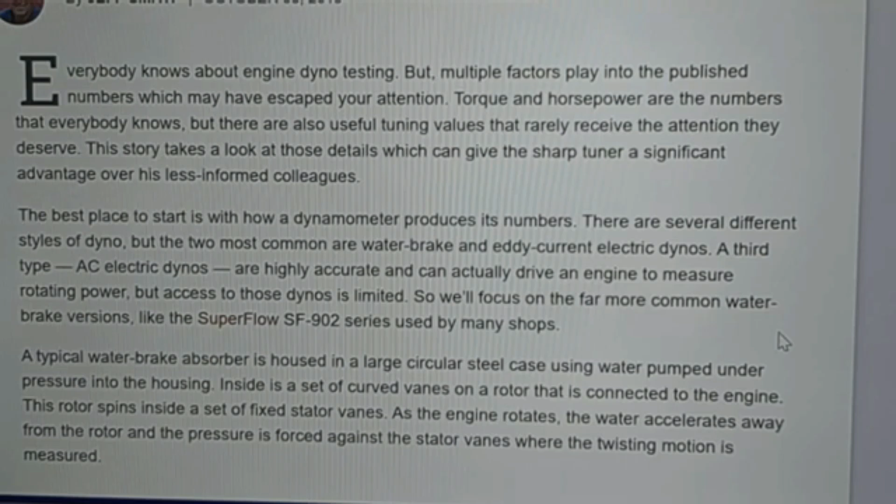This is where your temperature comes in. Anytime you push water under pressure at high speeds, the water gets hot, and very quickly. As this rotor spins, the water brake is bolted to a big steel rack assembly. If it were not bolted down, this engine would do backflips the moment you tried to load it down—the engine is trying to twist this brake, and the brake is bolted down on one side.

The other side is hooked to what's called a strain gauge. So as the brake is trying to pull away and actually rotate, the absorber can't rotate away because the strain gauge is hooked to that one end of it, and the other end is hooked to the frame. So the harder the engine pulls, and the more water they throw to it to stop the engine, it's putting that pressure on the strain gauge.

So imagine you're hanging out of a helicopter and you've got this person by one arm, right? He's hanging on to your arm. Well, your hands, where they're connected, holding onto that person, that would be the strain gauge. I know that's a weird example, but the more the helicopter accelerates upward, the more pressure you're going to feel trying to hang on to that guy. Well, as you rev that engine and load it down, that strain gauge is feeling every bit of that twist.

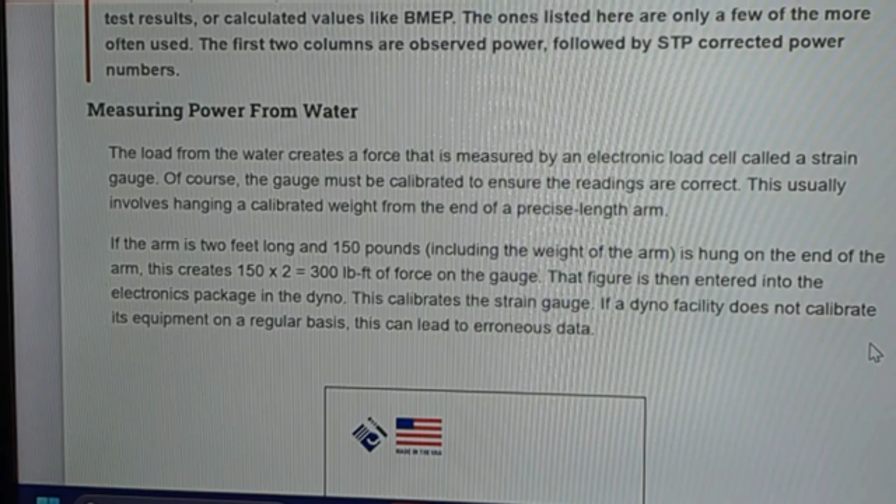So calibration is extremely important, and it's really simple. You may also see, if you go in a dyno room, a tall rectangular black looking box - at least ours always was - and it usually weighs between 100 and 150 pounds. You bolt this little arm onto your water brake absorber, usually a foot, maybe 2 foot long, and basically if it's 150 pounds on a 2 foot long arm, that's 150 times 2, that's 300 pounds of force on the strain gauge. So you go in there to your dyno and pull up calibration, if you have a nice digital one, and just make sure it's calibrated. It should be reading 300 pounds.

So that's the starting point, making sure your dyno is calibrated. Now the reason why it's important is because the dyno actually reads torque, and it reads torque from the strain gauge. Then we have a mathematical equation that says horsepower equals - and always work the parentheses first, like when you're doing math problems - torque times RPM divided by 5252 equals the horsepower. So it's pretty simple, and computers can do that kind of math super easy, super fast.

Now, when you get those numbers, that is observed power numbers that come directly off the dyno based on the atmospheric conditions you have right then at that moment. Anytime you're doing dynos across multiple days, your days usually are going to have a little bit different conditions. Sometimes they're pretty dang close, but this is why we have correction factors.

So if I'm dynoing a day where it's 98 degrees outside with 80% humidity, which it does here in North Carolina, and then I might be testing in November or December where it's pretty cold and dry air, hopefully my dyno can correct for that, and I can see that my engine is either performing as usual, or I'm down, or I'm up. That's the whole point of correction factors, so that you can be fairly consistent across different weather conditions.

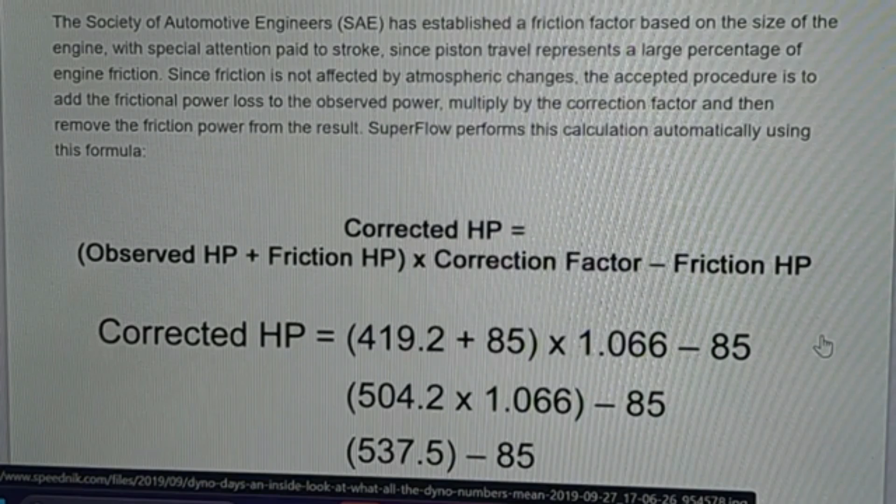Friction is not affected by the atmosphere. So the accepted procedure is to add frictional power loss to the observed power, multiply by the correction factor, and then remove the friction power from the result. That's how SuperFlow does it. Basically, you have corrected power, and then they take out what they consider to be the friction losses based on the size of the engine.

This is why, at least on the newer model stuff—the old stuff didn't really have much effect—but the newer stuff in the last 15, 20 years will accurately calculate the friction loss.

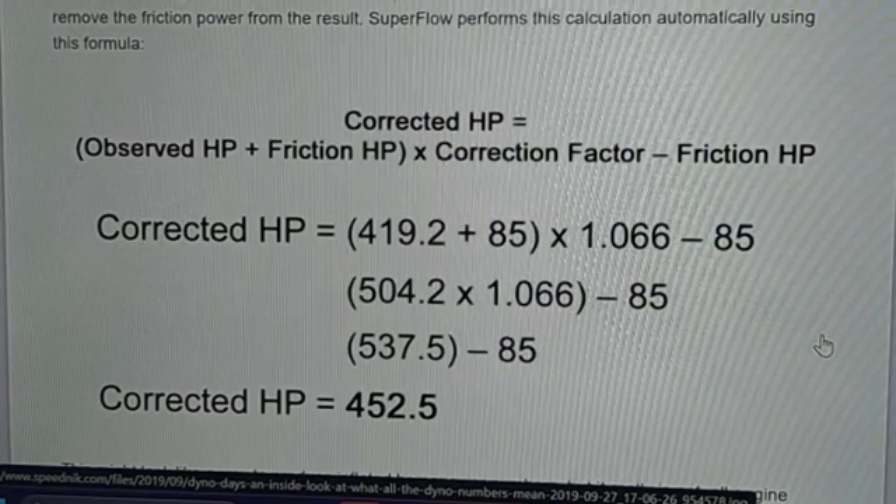But here's how you can fool that, okay, and this says good things about you as an engine builder. Basically, the friction loss is based off of stroke and piston travel. But what if you got that friction down to about nothing, comparatively? If you were able to get your coatings, your hone, your skirt, and your rings correct, think of the power you're freeing up because you cut that friction down. That's why I pay so much attention to that, because friction loss is a big deal. Now, the computer may think you have this typical friction loss, but it doesn't know that you've all but eliminated it. See what I'm saying? So there's a lot there to be gained.

Now, they made it a point here, and I think I should point it out, that the correction factors allow us to compare different combination tests on various days with reasonable assurance of comparable numbers, despite atmospheric changes. It's worth noting the Society of Automotive Engineers changed the production engine correction factor in '93 to reflect normal operating conditions more closely. The new standard is a pressure of 29.234 at 77 degrees Fahrenheit and 0 humidity. This reduces the corrected power numbers by roughly 4% compared to the STP version.

You'll notice that where I live, at sea level, it's a different number and a higher temperature than at sea level with the old STP correction factor. So they've changed that now, and it should be a lot more accurate than it was.

Now, I'm not going to get deep into this, but I really want you to pay attention here. The BSFC, brake specific fuel consumption—this is a measure, and this is where a lot of people don't understand it. It's a measure of efficiency, but it's often misconstrued as a measure of whether the engine is rich or lean. Thank you very much, Engine Labs. An engine with a BSFC of 0.52 does not necessarily run richer than one with a brake specific of 0.42. What it means is that the latter engine requires less fuel to make the same power. So don't try to figure out your BSFC as a richness indicator—understand what it actually is. And if you don't do dynos yourself, but maybe you get some done, this will help you understand what you're looking at.

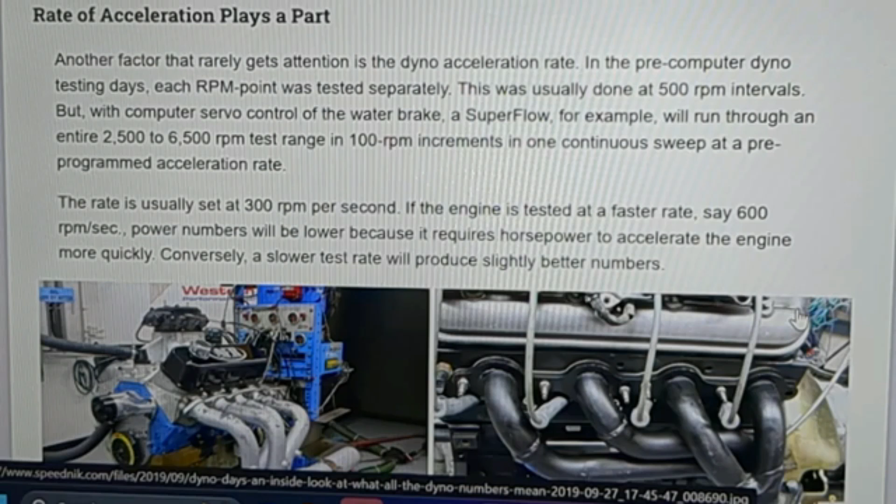Some people do steady state checks, which is a great thing to do. You go to a certain RPM - let's say 3,000 - and just hold it there. The engine will record a torque and horsepower number right there. It's not climbing, it's just at 3,000. Then you can go to 3,500 and hold it there, and it'll record the numbers, and on and on. Those are called steady state pulls, and they're very accurate.

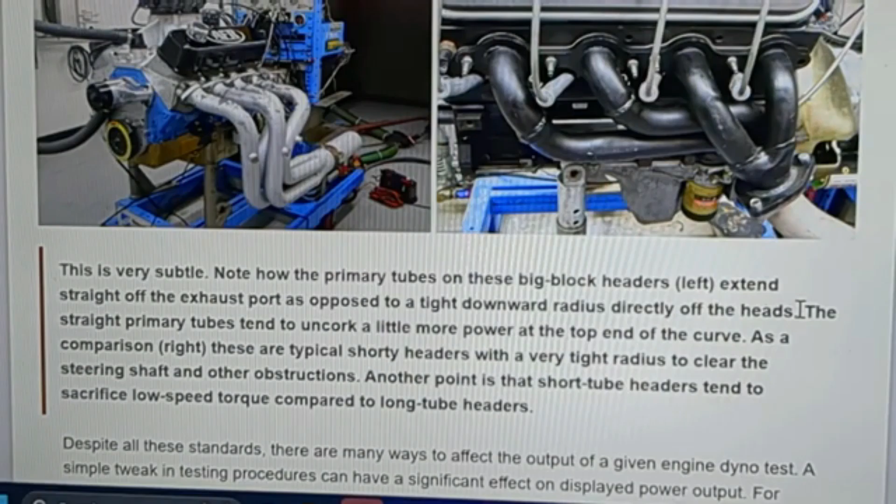Now we're getting to the point of this video. Notice this footnote - it says note the primary tubes on these big block headers. On the left, they extend straight off the exhaust port, about 8 inches or so, as opposed to the right side where you have an immediate downward turn. Do you think these two headers make a difference? You bet. Notice the exhaust - you've got a header there and maybe an 18-inch collector afterwards. Keep that in mind as we go along.

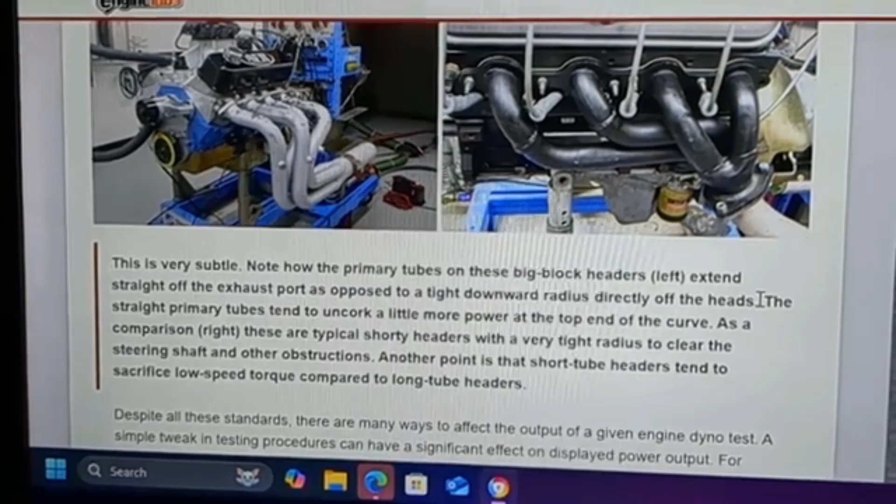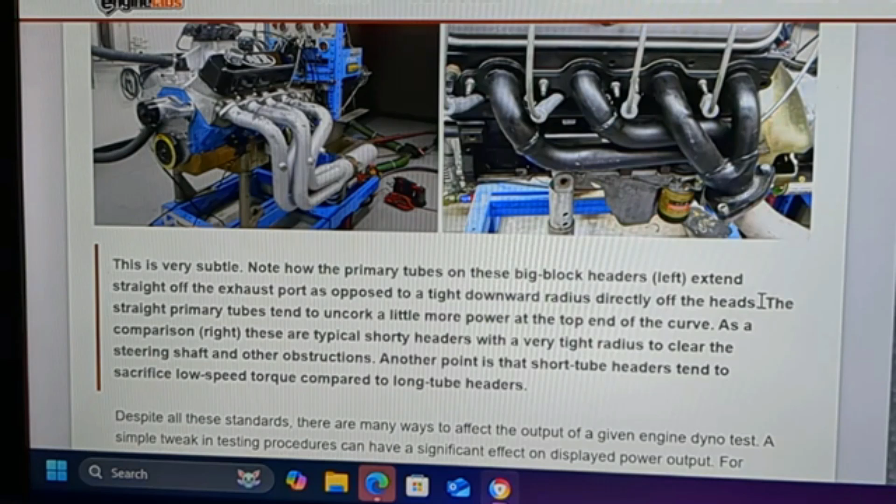The straight primary tubes tend to uncork more power. The ones coming straight off the head will make more power at the top end of the curve compared to the right. Those are typical shorty headers with a very tight radius, put in there for steering shafts and other obstructions. The short tube headers tend to sacrifice low speed torque compared to the long tube headers, which with the larger pipe and straighter path off the head are just better everywhere.

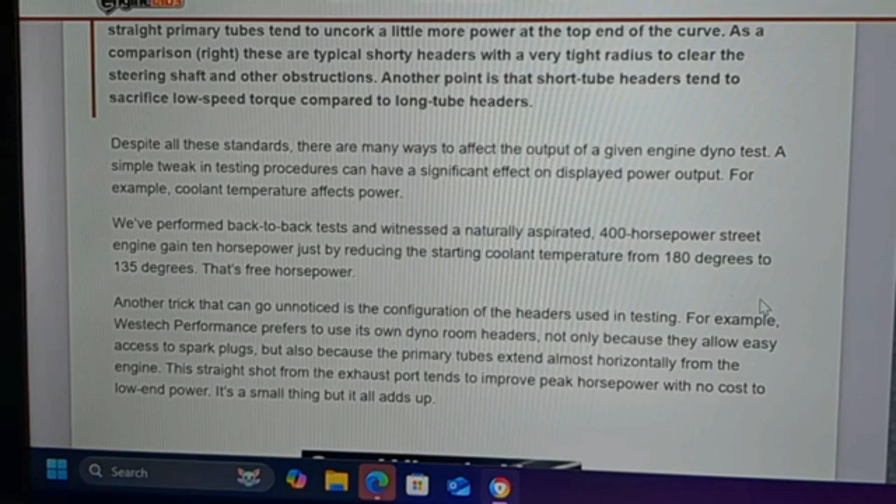Going back to the temperature of the engine, this article says we performed back-to-back tests and witnessed a naturally aspirated 400 horsepower street engine make 10 more horsepower by reducing the starting coolant temp from 180 degrees to 135. So just from the water temp alone it was over 10 horsepower. Another trick that can go unnoticed is the configuration of the headers used in the test.

Westech prefers to use its own dyno room headers, not only because they allow easy access to plugs, but also the primary tubes extend horizontally from the engine. This straight shot from the exhaust port tends to improve peak power with no cost to low end power. It's a small thing, but it all adds up.

Here's something I learned many years ago in NASCAR land: one day everybody started cutting their air cleaners down. Look at the left and right air cleaner base. Notice the one on the left is taller than the one on the right. Well, the one on the right makes about 8 more horsepower than the one on the left. Pretty crazy, huh? Also, I don't like these flat bases here. I like the one with the big arching radius. But I don't know, I'm going to have to go back and do some more testing on some of this.

On a few cars that I built for, we changed to this style lid. We actually went in there and machined this down, and we wound up putting it on a belt sander once we got it all cut down to get it back flat again. And yeah, 8 horsepower is 8 horsepower, right? Little things like that matter. Don't let anybody tell you that little things don't matter, because they do. And if you get a whole bunch of little things, it adds up to big numbers.

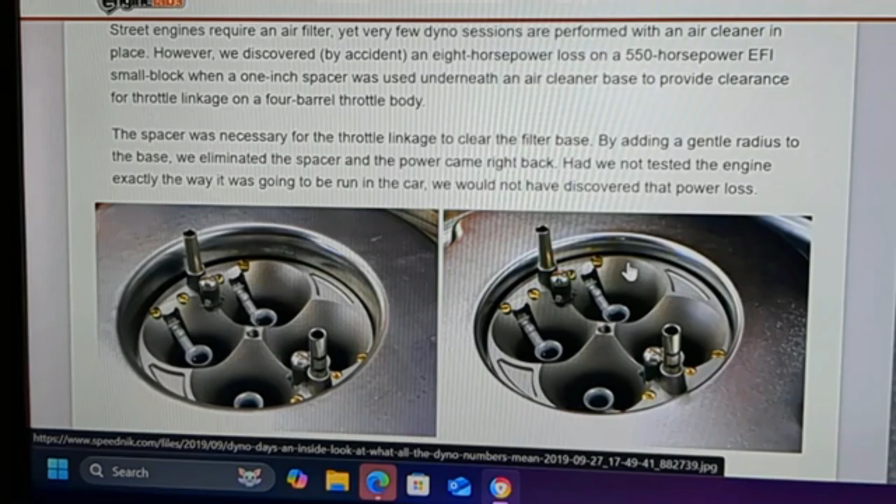So I've told you some things that will affect your dyno readings: your temperatures, whether it's air, whether it's water of the engine, whether it's water of the dyno cell itself, the air temperature coming in, the humidity, barometric pressure. All of those things, your calibration, all that stuff affects from one pull to the next, right?

So here's one that is a big thing, and this is what I said in my one video about dyno wisdom. In the video, I said that you need to make sure your dyno is prepared to handle multiple changes, because some dynos have the same exhaust pipe, like 3.5 inch, and it looks like 3.5 inch all the way out, right? It might be 10 to 15 feet long before it goes into a muffler.

And the reason that's a problem is because when you change induction, different intake manifolds and different headers, or different camshafts, the exhaust starts to back up in the pipe, and it will, when your horsepower gets high enough. It affects your engine at overlap. So when both valves are open, the exhaust backing up will cause you to have low intake flow because it's flowing up into the intake.

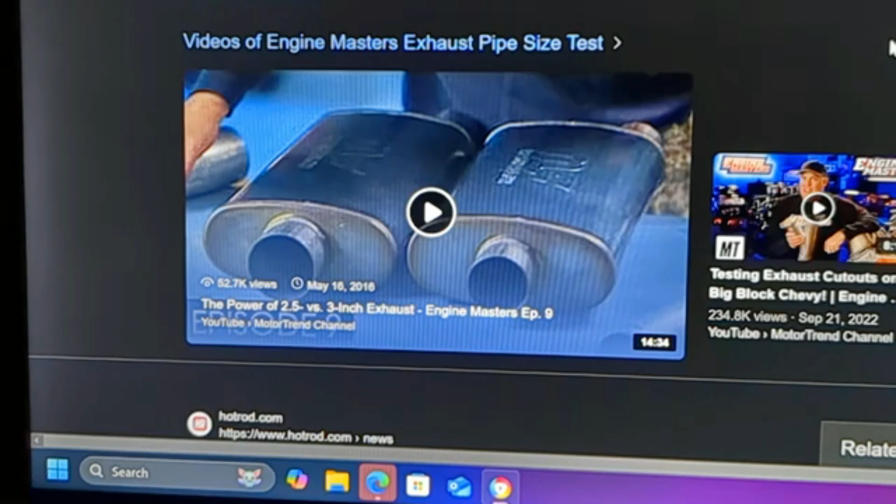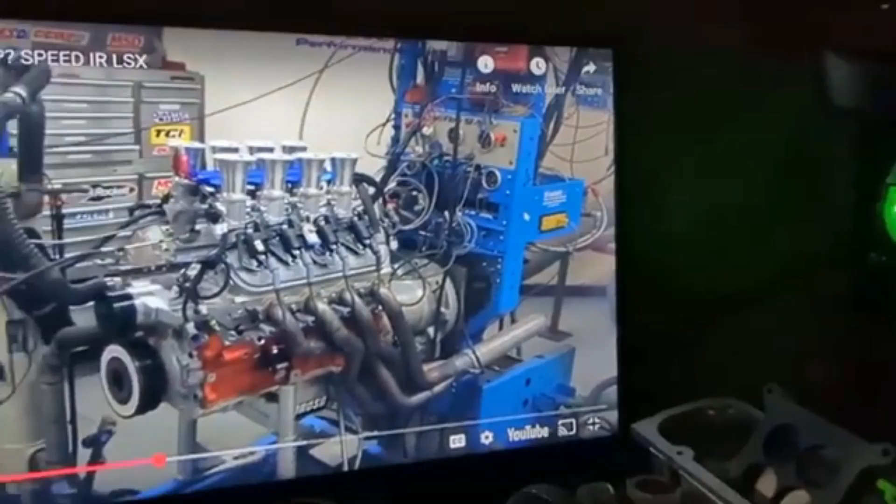Now here's what I want you to see. Look here, look behind it. Everybody see that pipe? You see this right here, in the background? That is the exhaust pipe for the dyno room. That thing is a good 10-inch or so diameter. Those are the ones like we ran on our dyno, and every dyno I've ever been on, that's how it is. So we don't want any kind of exhaust system affecting our test.

Some camshafts will need more exhaust than others due to the overlap. And that's why I say you can have a cam that might be great for the engine, but your exhaust system made it look bad. These things apply when you have enough horsepower to make them apply. So once you start crossing over 500 horsepower, things start to change. And 600 is not the same as 700, 700 is not the same as 800, 800 is not the same as 1,000. All those horsepower levels require different things.

Now, I have 2 college degrees and, I don't know, a couple of master certificates, but here's the deal: you can figure out how much air your engine's pushing, and you can figure out how much capability the pipe you have will flow. But it's also beyond that because of the heat involved.

Does anybody know why we like to 100% ceramic coat headers, or why having different metals in the exhaust will change the way the exhaust flows? Did you even know that? You can go from cold rolled steel to stainless steel to Inconel to 100% ceramic coated, and it will flow different amounts. The whole point of the exhaust header is we want to keep the heat in the pipe, because the hotter the pipe is, the more air it flows. It's also very difficult to 100% ceramic coat headers, because it's really hard to get the ceramic to stick on the inside, and that comes straight from the coaters themselves. So obviously stainless or Inconel is the best thing to use.

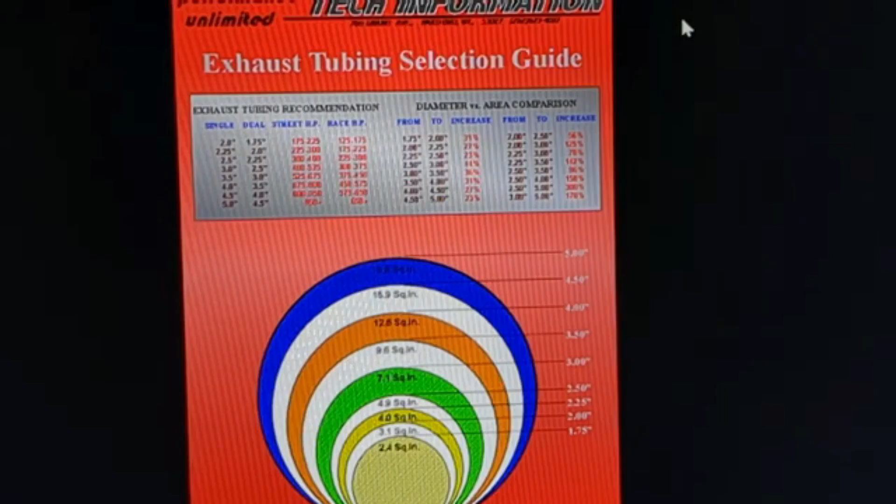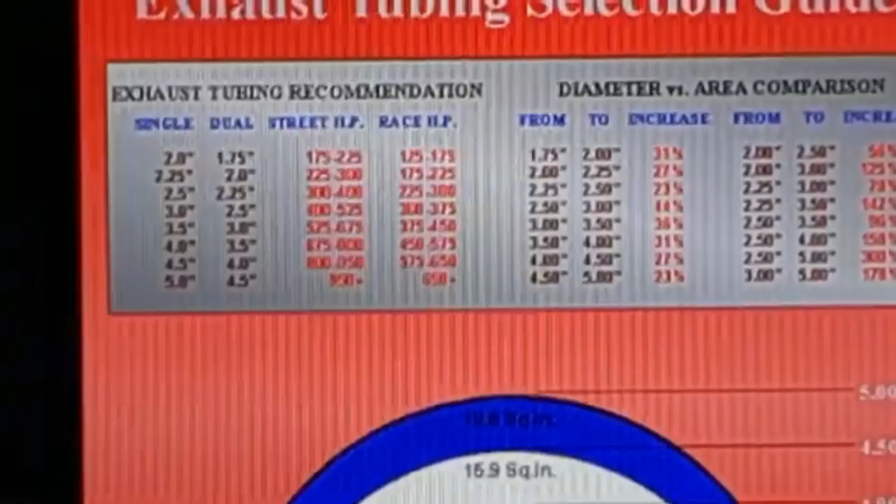It's just expensive. I thought you might find this interesting. Here is a chart that basically tells you if you're at this power, this is what you need for exhaust. I don't know if you can see that too well, but you can Google this.

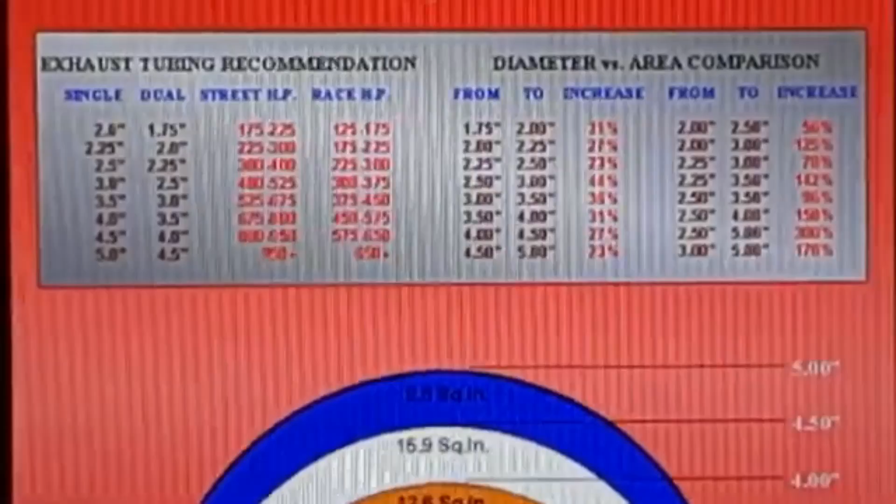But basically, it has street horsepower and race horsepower. And you remember my first dyno video, I said if you're doing street car engines, these tests aren't really going to affect you that much. If you're doing racing stuff, what I'm saying 100% affects you. 100%, okay?

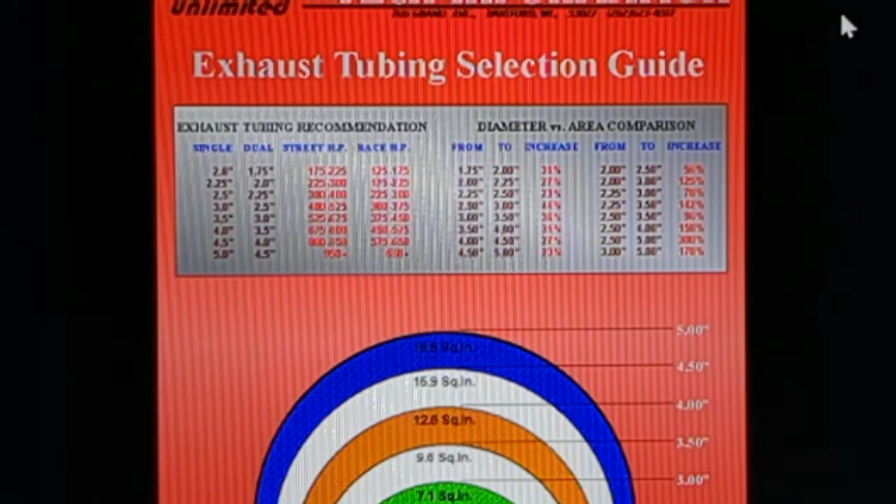So right here on the left, if you're running race horsepower, 3.5-inch is done at 575 according to these people. If you're at 650 horsepower, you need at least a 4-inch exhaust pipe, and 4.5 for anything over 650. And that's the truth, and that's why we run the pipes the size we do.

For one thing, your little street engine might be going 5 to 6,500 RPMs, and my race motor is going to be turning between 8 and 9,000. So the airspeed, the velocity, the volume is a lot more than it is with that little street motor.

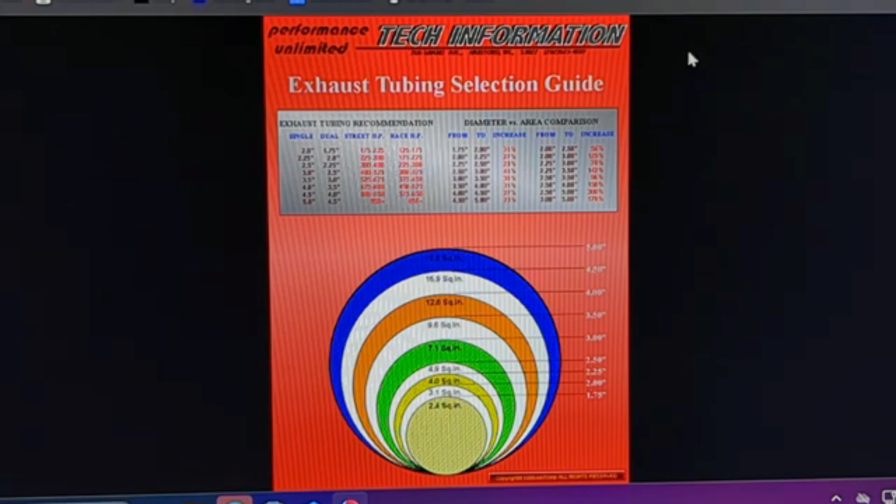Now this next thing I'm going to show you, because I don't run these types of pipes on my engine tests or my dynos. We have our pipes step up really large, pretty much right off the header. So I'm not going to do this just to prove it, but Engine Masters did, and I'm glad they did, because now I'm going to show you this video. They did a test on a 600 horse engine, a 620 horse big block, not that high RPM, with 2.5-inch exhaust compared to 3-inch exhaust compared to 3-inch with an 18-inch pipe.

All right, let's watch this and see. So here we go.

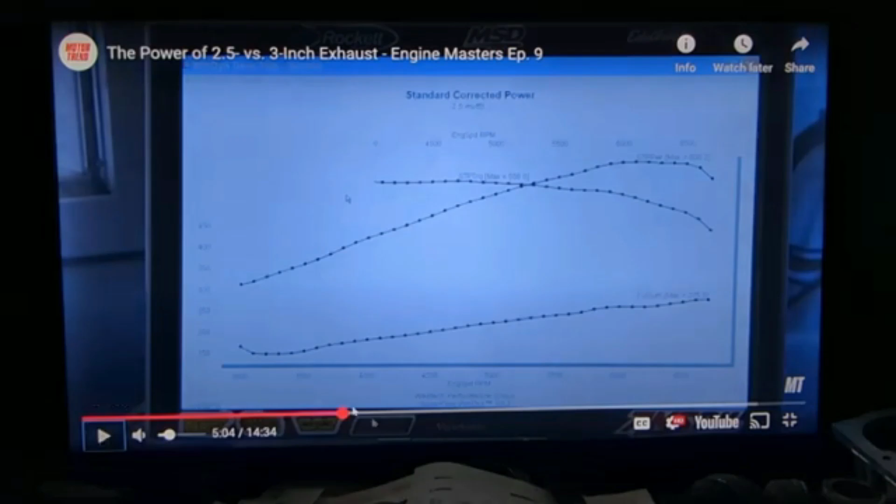Okay, we just took our engine that made 620 horsepower and turned it into a 600 horsepower engine, and we used to make 584 or 5 pound-feet, and we turned that into 556. Right now we're going to pull up the test with it on open headers with an 18-inch collector extension and no muffler whatsoever.

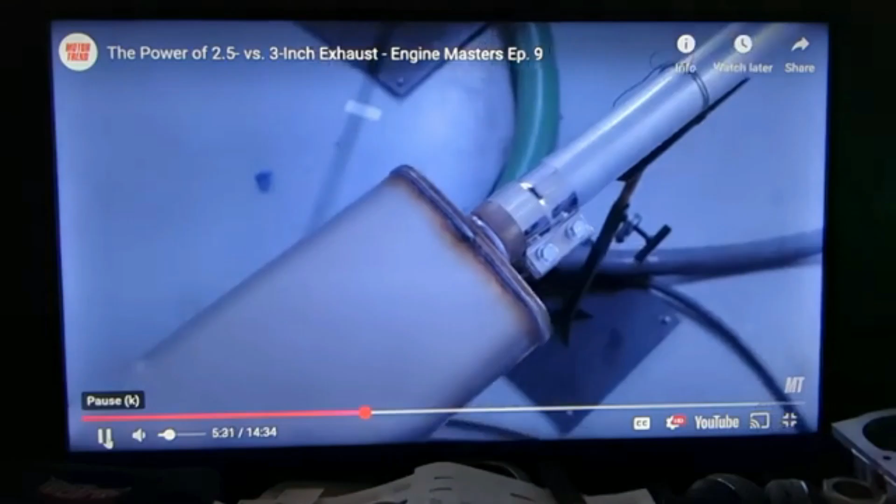Engine, 556 pounds of torque, 600 horsepower. So now we're going to go put on the 3-inch and hopefully it improves that a little bit. So they were at 620 and 580 on the torque, and now you see where they are. It's got to, it has to. I bet it makes it louder. Right? Think so? Oh yeah.

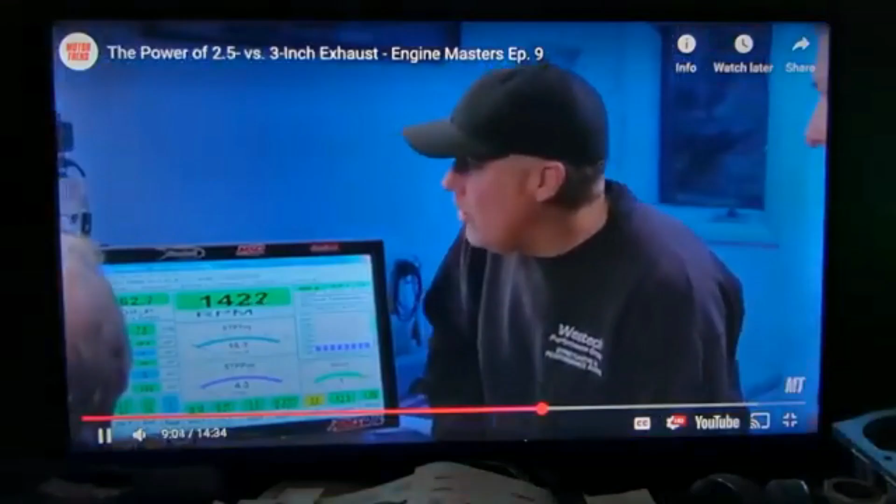We can hear it loud. Yeah, because it is depressing. We threw away 20 horsepower and how many pound-feet? 30. You know, with the 2.5-inch exhaust, and we're throwing the 3-inch on right now, and we're looking to find our 620 horsepower again. Think we'll get there? No. They got the 3-inch on there. What we're going to do is run out there, and I need you to calculate the total volumetric difference in pipe.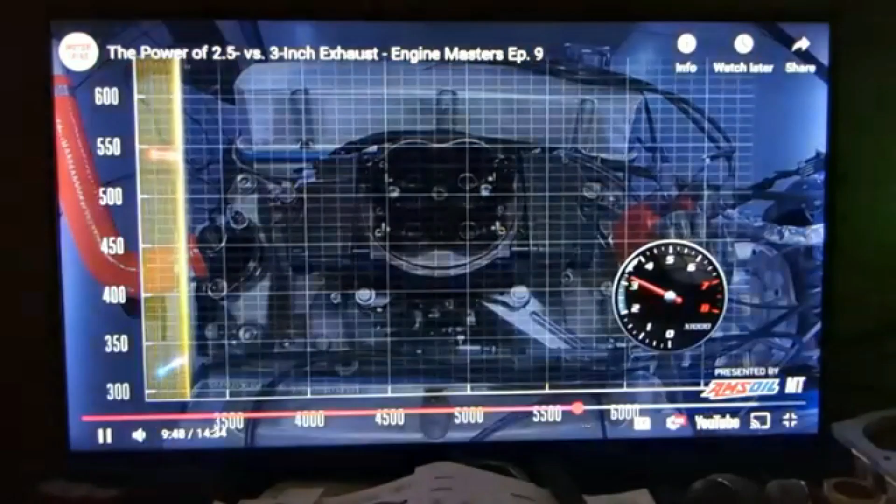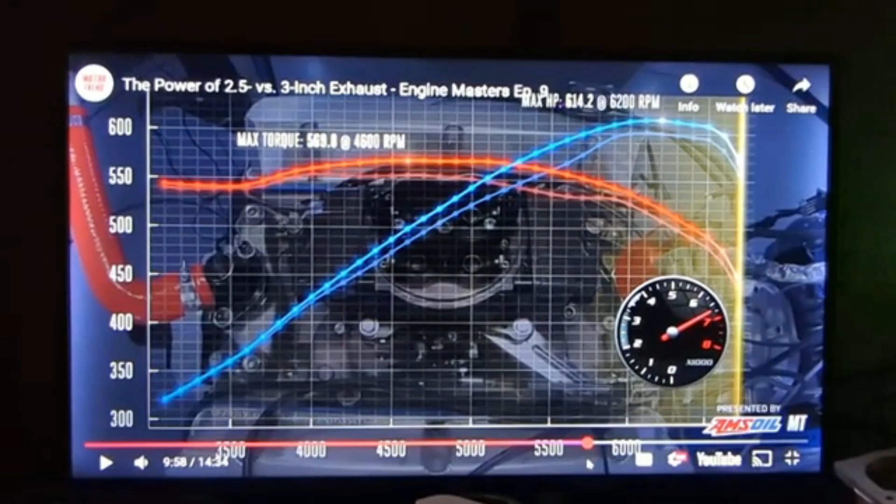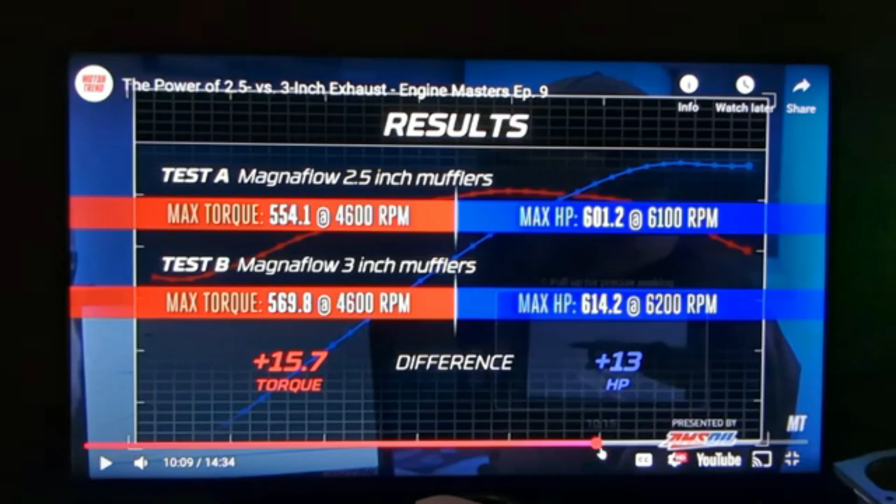Now look at that. They put the 3-inch on, and they're up to 570 on the torque and 614 on the horsepower. Okay, so that's with mufflers. So exhaust doesn't matter, huh? All right, let's move on.

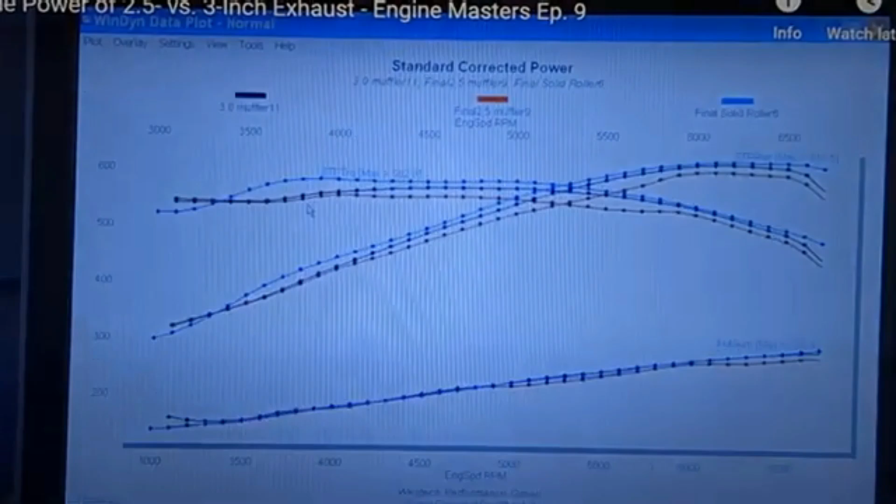Now what they've done is, when you look at the blue line, that's a 3-inch, 18-inch extension on the header. So it's 18 inches on the header, an extension that's 3 inches in diameter. The black line is a 3-inch exhaust system, and the red line is the 2.5-inch.

Like I said, you can go and watch this yourself. But with the 18-inch extension, they're up to 618.5, which is basically 619 horsepower. They're at 583 foot-pounds. So you're talking about darn near over 20 horsepower and over 30 foot-pounds of torque going from a 3-inch exhaust system to a 2.5.

So imagine, again, this is just 600 horse. Imagine a high revving, higher horsepower engine, the benefits to that. And so when you're doing testing, that backup in the exhaust system, as it backs up, will change. It's going to mess up your induction flow because of overlap, because of the back pressure. And if you're doing all these different variables, such as different intakes, different carburetors, and different camshafts, that's when the exhaust system comes into play.

So you don't want your exhaust system to interfere with your test, is what I'm saying. And like I said, with racing, it's extremely important. That's all I'm talking about is racing. I would never test a race engine with little tiny exhaust pipes that go all the way out. I just wouldn't do it, because that's not what the engine is going to see.

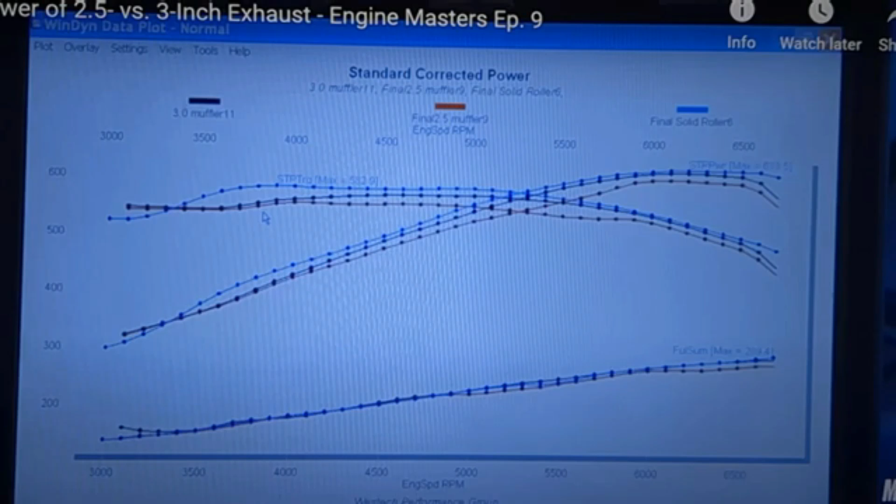That's why your torque would change. So I may decide that this cam that actually is really good is not good, because my exhaust system threw off all my readings. And that's the whole point I'm trying to make, is that when you do dyno testing and you're trying to learn what is the better component, you have to make sure the dyno room is freed up enough to allow you to do that. And that's why I'm showing this video.

Now lastly here, I wanted you to see this. This is Ford Motor Company, research and development in Dearborn, okay? The guy says, the last water brake I had anything to do with was with Heenan Froude. It was good for about 800 horsepower. It had a 2,000 gallon water tank. It had a huge radiator and fan with about a 2 to 3 horsepower circulation pump.

They tried to keep the inlet water temp to 32 degrees. If the water gets too hot, it can cause cavitation. We're talking about the absorber. And when you get cavitation in your absorber, your engine torque and horsepower numbers completely change.

The guy says, have you ever been to Ford's R&D campus in Dearborn? There is an outdoor pool. Listen to this. There's an outdoor pool that looks like it's just landscaping. It's 300 by 500 in size, 20 feet deep. And it is the water tank for the dynos. It never freezes.

Do you understand the importance of what I'm saying? It's such a big deal to keep the water temps stable and not get hot. And that's why people go through these extremes. I was told the other day, Lake Speed told me that one of the guys just got a brand new dyno a few weeks ago that was all the stuff done. Now, you know, this is everything, the room and the exhaust and the whole 9 yards. They have over $2 million invested in that.

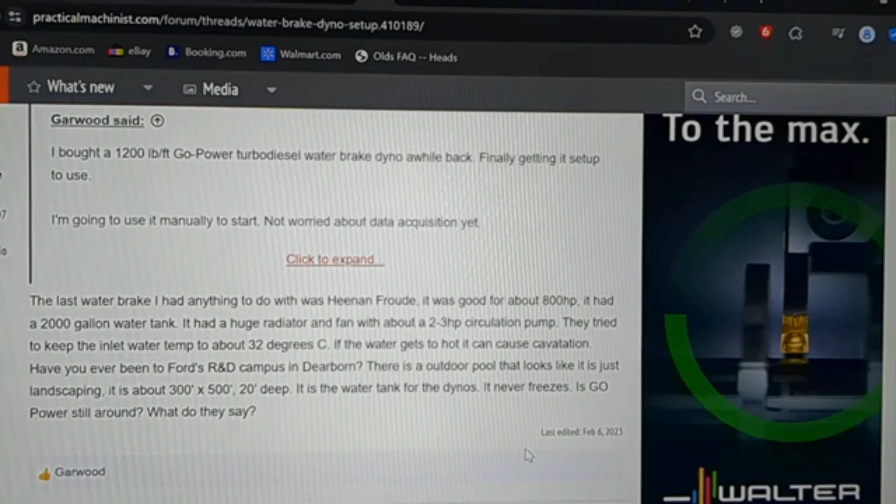So, in closing here, you know, I've been on the dyno for a long time, and I don't know. I hope you're learning something from this, and a lot of you are. And there's always those that don't, but I'm trying to help everybody. So all this stuff matters.

Everything affects everything. I'm going to be doing a video soon on how to tune with camshaft lobe separation angle, and it's going to be really interesting for you, something I've been doing for quite a while.